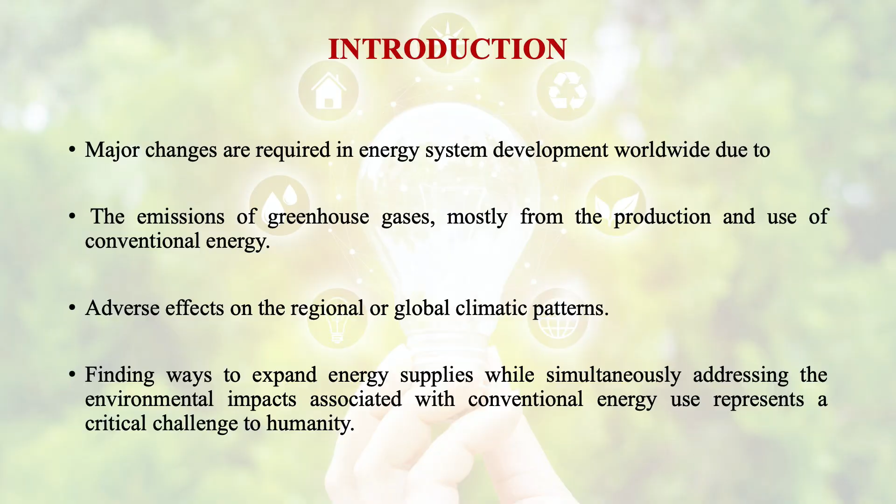Finding ways to expand energy supplies while simultaneously addressing the environmental impacts associated with conventional energy use represents a critical challenge to humanity. What is the effect of energy on environment and health? The resources and technology options that are available to meet these challenges are identified as energy efficiency, renewable energy sources, and advanced energy technologies. And the relation between energy and social issues is related to addressing the energy needs of the majority of rural people, especially the poor ones who could not pay for the energy that is available commercially.

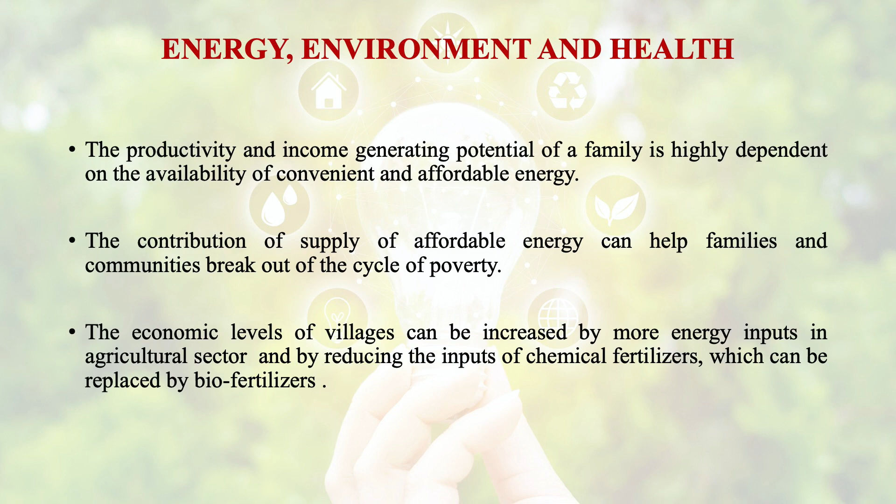A large majority of rural masses have very low ability to pay for energy in our country and require major structural changes. The productivity and income generating potential of a family is highly dependent on the availability of convenient and affordable energy. The supply of affordable energy can help families and communities break out of the cycle of poverty. The economic levels of villages can be increased by more energy inputs in the agricultural sector, such as increase in irrigated land area, and by reducing the inputs of chemical fertilizers, which can be replaced by fertilizers such as biogas manure. So biogas is very important to make our villages self-reliant in energy.

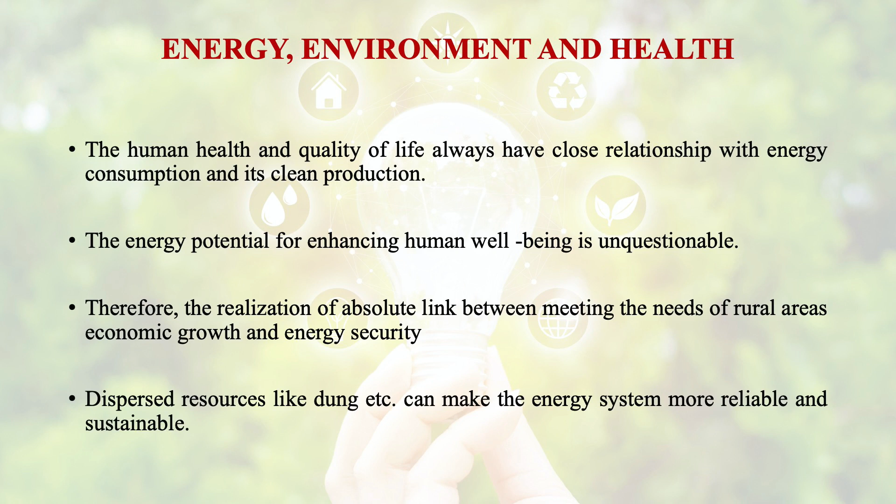Human health and quality of life always have a close relationship with energy consumption and its clean production. The energy potential for enhancing human well-being is unquestionable. Therefore, with the realization of the absolute link between meeting the needs of rural areas, economic growth and energy security, dispersed resources like dung, etc. can make the energy system more reliable and sustainable. On the other hand, in developing countries, most of the inhabitants in rural areas are dependent on dung and organic residue as fuel for cooking and heating.

Such is the case, for example, in the treeless regions of India, like the Ganges Plain and Central Highlands. And it is not only limited to India; the same condition is in Nepal and other countries of Asia as well. So the burning of dung, plant residue, even wood is a considerable waste of plant nutrients. Burning wood is not at all a good or wise decision.

Other than land, labor, capital and water, energy and manure have also become the most crucial factors for economic and social growth of villages. Efforts have to be made in this direction to create self-reliant villages in terms of energy, and the byproduct will be manure production by biomethanation technologies. Local resources like cow dung, waste from agricultural lands, and waste from the kitchens will be utilized there. This effort would provide a firm basis for economic and social development and long-term sustainability as well.

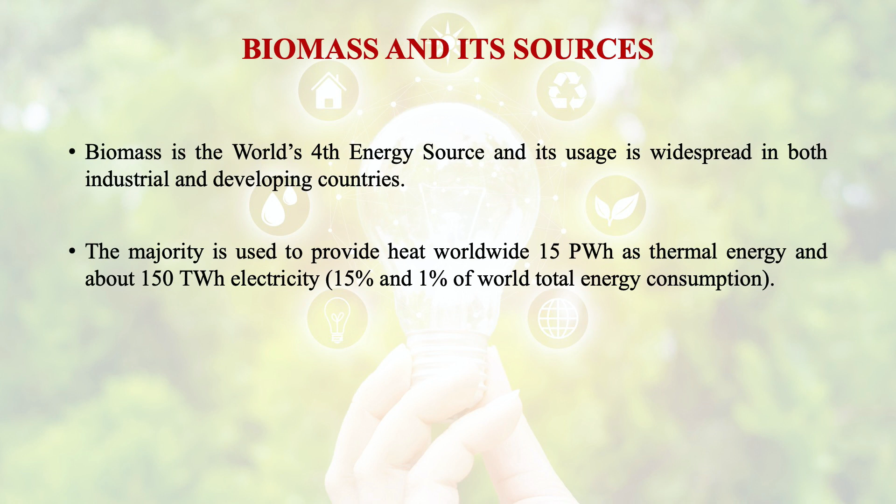15% and 1% of world total energy consumption. It means that 15% of thermal energy and 1% of electricity all over the world is provided by the biomass.

The major resources which can be used for biogas production are animal manure, poultry waste, pig waste, night soil, municipal organic waste, agricultural residues, forest residues, aquatic plants like water hyacinth, organic waste water from industries, either food processing, milk processing, meat processing, etc., hotels and restaurants, sanitary landfills. All these products or all these resources are generally the organic waste.

So what we need is a product that is organic in nature. It could be waste because we are going to utilize waste. We are going to generate energy from the waste.

Biogas. What is biogas? Biogas is a technology that refers to the production of a combustible gas, which is known as biogas, and a value-added fertilizer also, which is called slurry or sludge. And the process that is used to produce this biogas is the anaerobic fermentation of organic materials under certain controlled conditions.

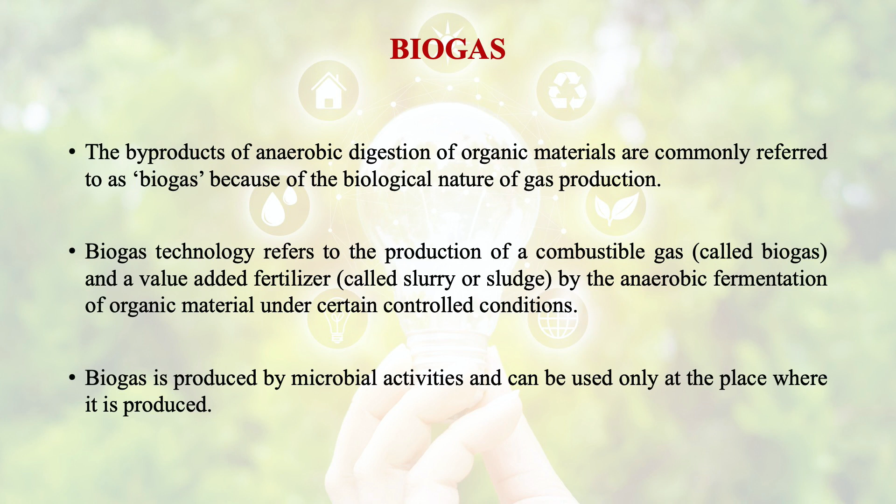The byproducts of anaerobic digestion of organic materials are commonly referred to as biogas because of the biological nature of the gas production. Because this gas is produced biologically, we are calling it biogas. It is produced by microbial activities and can be used only at the place where it is produced.

Though we are developing biogas bottling plants as well, and we are transporting this biogas in cylinders as well. But for that, we are going to purify that gas and use it for the transportation sector. The best utilization of biogas at least price is to use it at the place where it is produced. The transportation cost associated with biogas, either in a bottling plant or something else, is more.

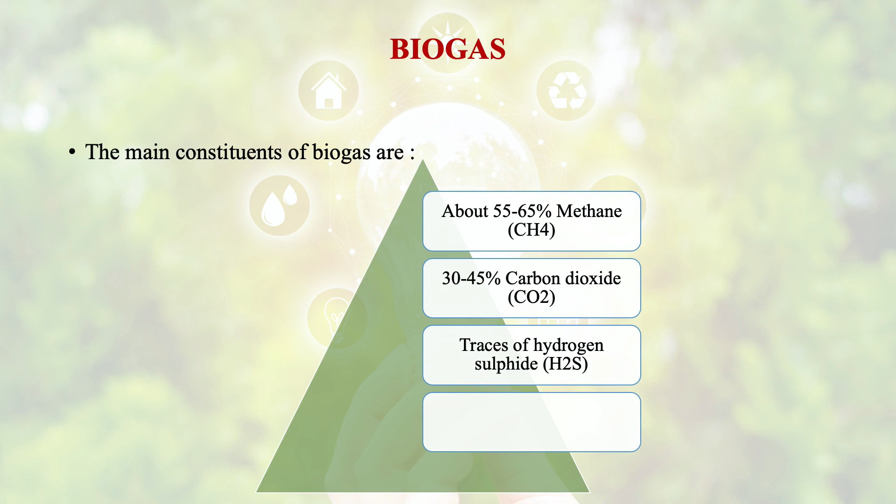And what are the main constituents of this biogas? Biogas consists of about 55 to 65% of methane, CH4, 30 to 45% of carbon dioxide, some traces of hydrogen sulfide, and a fraction of water vapor. Due to the presence of this water vapor, the calorific value of biogas is somewhat lower.

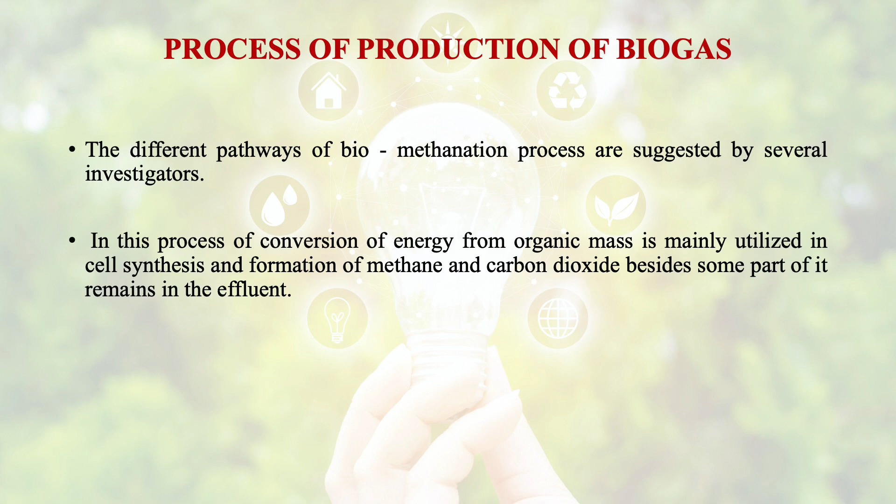What is the process of production of biogas? There are different pathways of the biomethanation process which are suggested by several investigators. Macro level energy conversion of organic waste is discussed here. In this process, energy from organic mass is mainly utilized in cell synthesis and formation of methane and carbon dioxide, besides some part of it remains in the effluent. This process of biomethanation consists of three processes.

First is hydrolysis. In hydrolysis, saprophytic bacteria convert complex organic compounds into less complex organic compounds which are water soluble. Hydrolysis is the first step in this anaerobic degradation and also the rate limiting step. From here we can determine the rate of production.

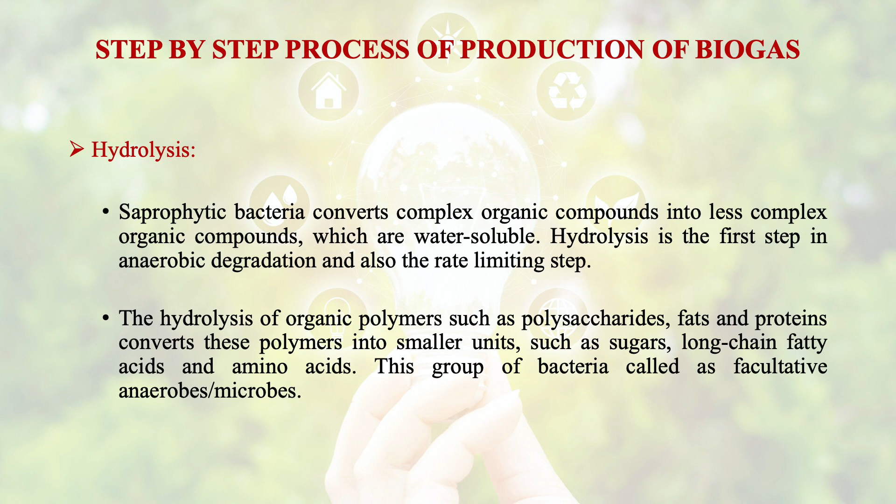The hydrolysis of organic polymers such as polysaccharides, fats and proteins converts these polymers into smaller units such as sugars, long chain fatty acids and amino acids. This group of bacteria is called facultative anaerobes or microbes.

Then the second process is acetogenesis. In this process, the sugars, long chain fatty acids and amino acids resulting from hydrolysis are used as substrates by a wide variety of different fermentative organisms or by anaerobic oxidizers.

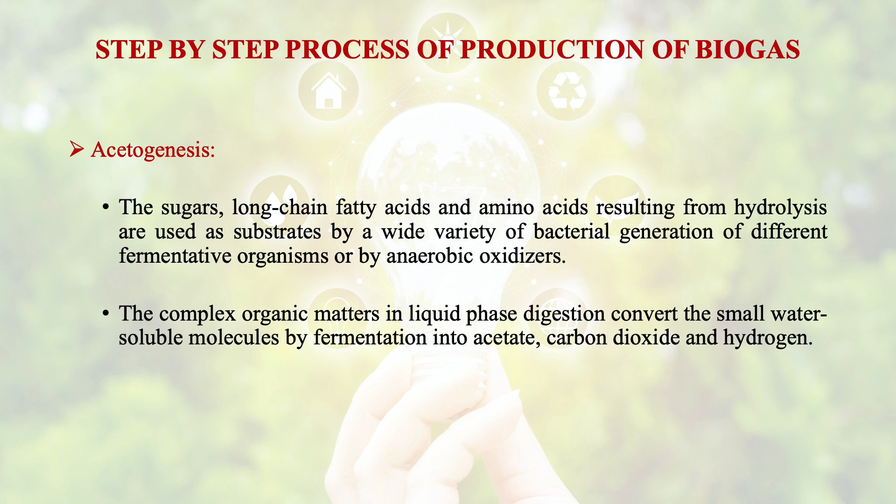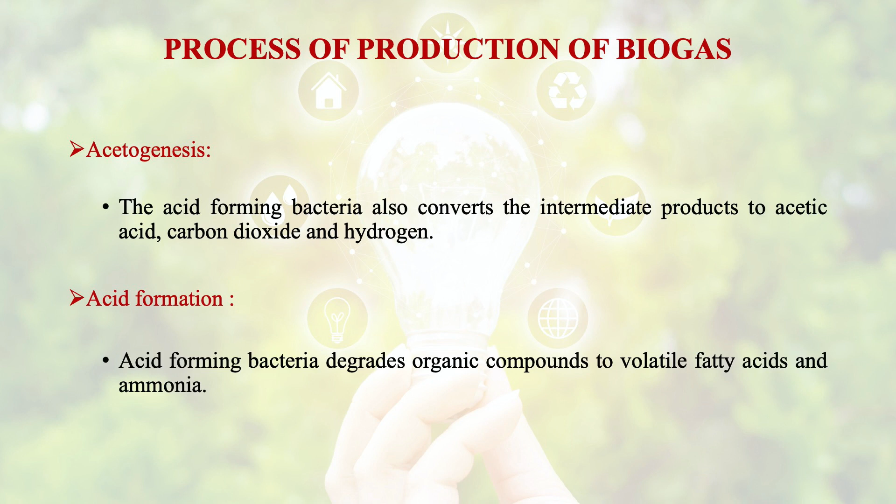The complex organic matters in liquid phase digestion convert the small water soluble molecules by fermentation into acetate, carbon dioxide and hydrogen. The acid forming bacteria also convert the intermediate products to acetic acid, carbon dioxide and hydrogen. Then acid formation. Acid forming bacteria degrade organic compounds to volatile fatty acids and ammonia.

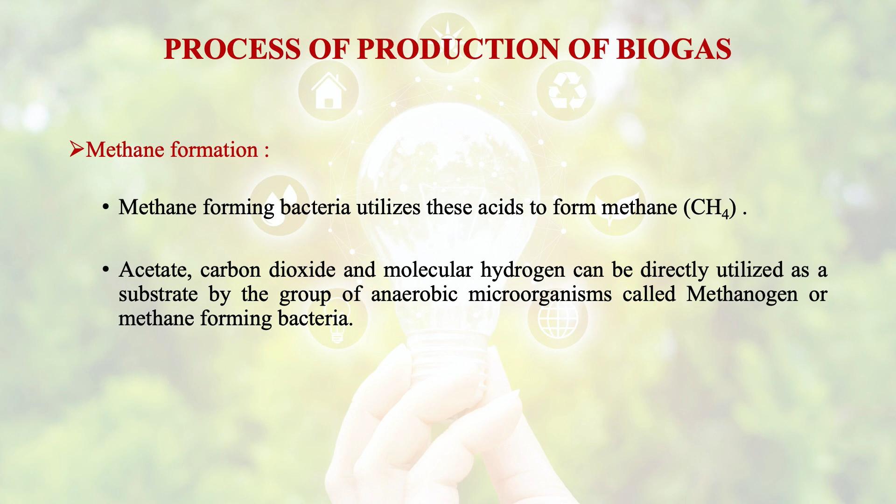Then the last step is methane formation. In methane formation, methane forming bacteria utilize these acids to form methane. Acetate, carbon dioxide and molecular hydrogen can be directly utilized as a substrate by the group of anaerobic microorganisms called methanogens or methane forming bacteria.

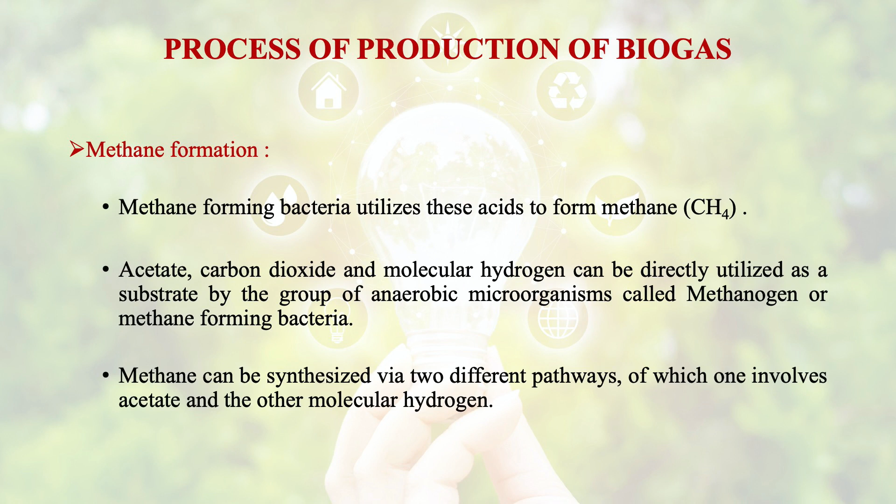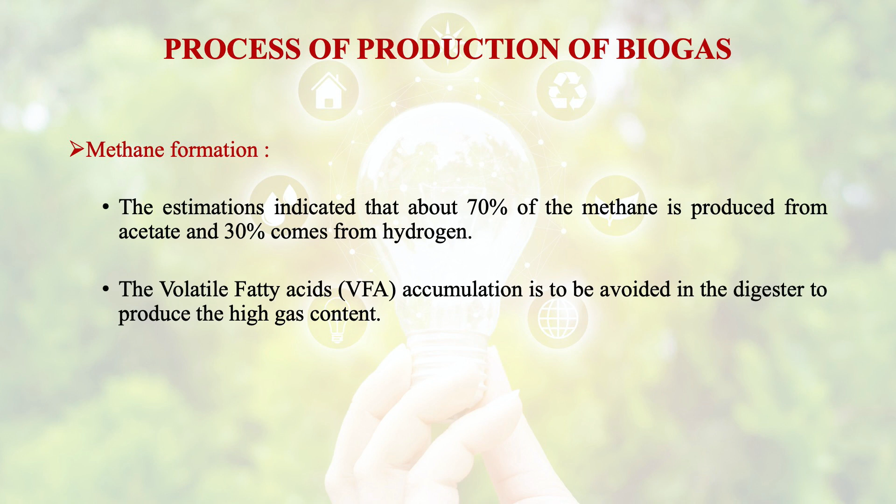Methane can be synthesized via two different pathways, of which one involves acetate and the other involves molecular hydrogen. The estimations indicated that about 70% of the methane is produced from acetate and 30% comes from hydrogen. Volatile fatty acid accumulation is to be avoided in the digester to produce high gas content.

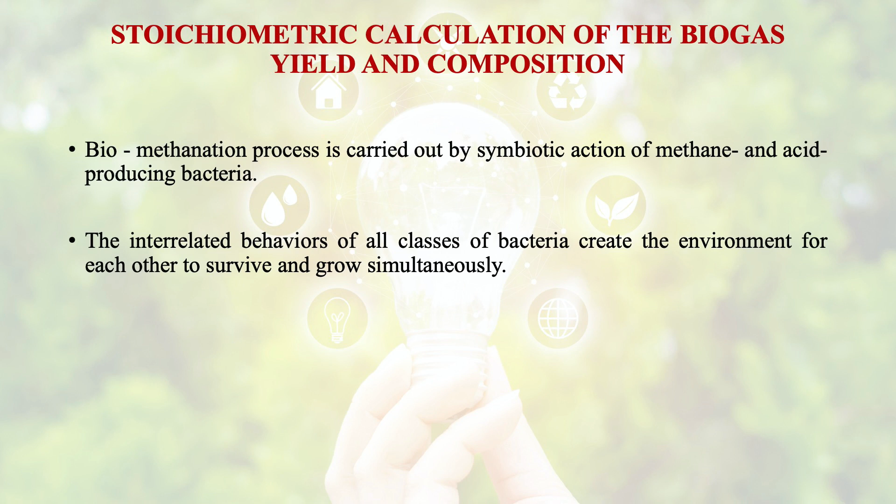Then the stoichiometric calculation of the biogas yield and composition. As this biomethanation process is carried out by the symbiotic action of methane and acid producing bacteria, the interrelated behaviors of all classes of bacteria create the environment for each other to survive and grow simultaneously.

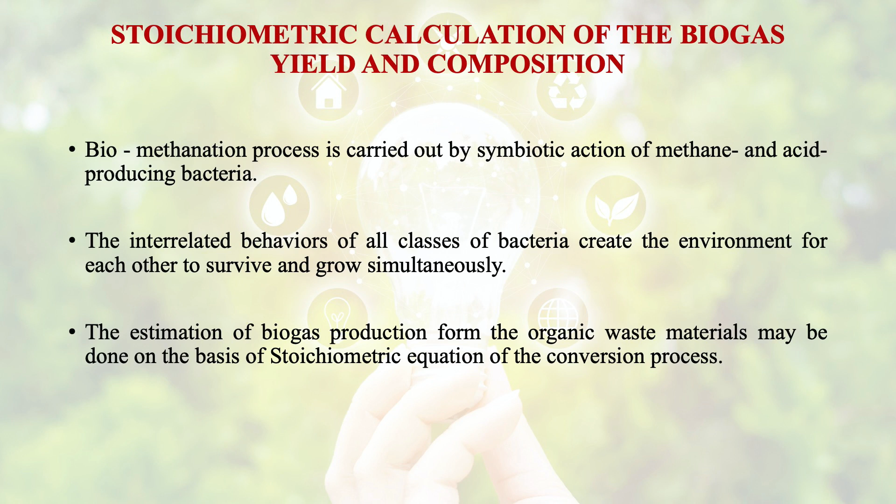The estimation of biogas production from the organic waste materials may be done on the basis of the stoichiometric equation of the conversion process. The simple equation is considered by Ghale and Ramkumar for calculations of the theoretical yield of methane and carbon dioxide, which is biogas, produced by anaerobic digestion using Buswell's formula.

We consider this organic compound as CnHaOb, and when it reacts with H2O, how many moles of H2O will be there? We have to calculate it on the basis of n. n is the number of carbon atoms. So the moles of water will be (4n minus a minus 2b)/4, where n is the number of carbons, a is for hydrogen, and b is for oxygen. 4n minus a minus 2b.

Suppose we have C6H12O6, then n is 6, a is 12, b is 6. So 4n minus a minus 2b, and what will it give? It will give 4n plus a minus 2b, whole divided by 8, these moles of CH4 we are going to get, and 4n minus a plus 2b, whole divided by 8, these moles of CO2 we are going to get. Means equal moles of CH4 and CO2 we are going to get.

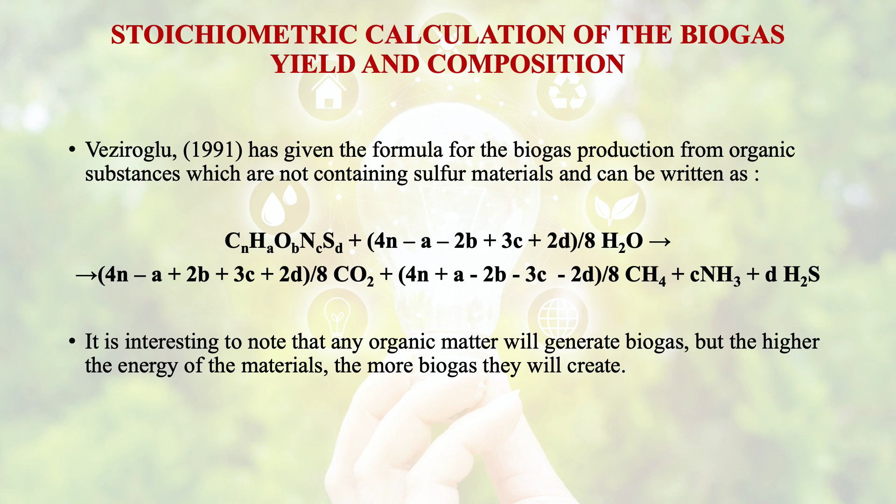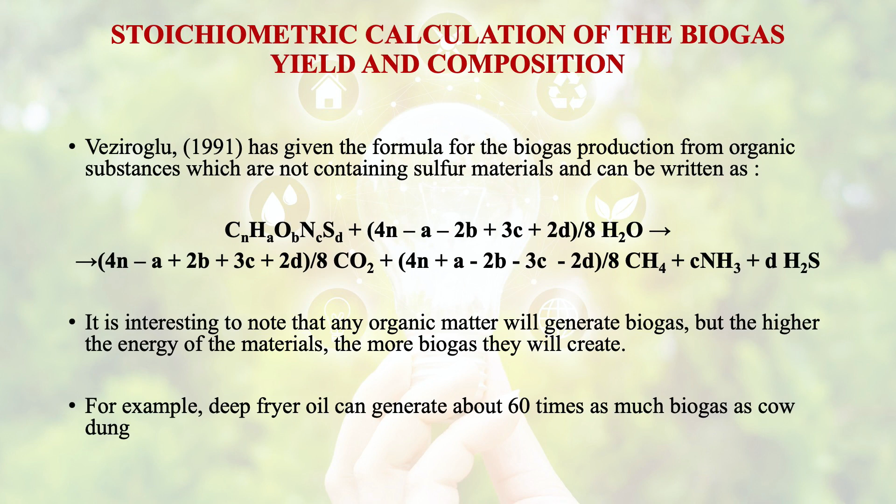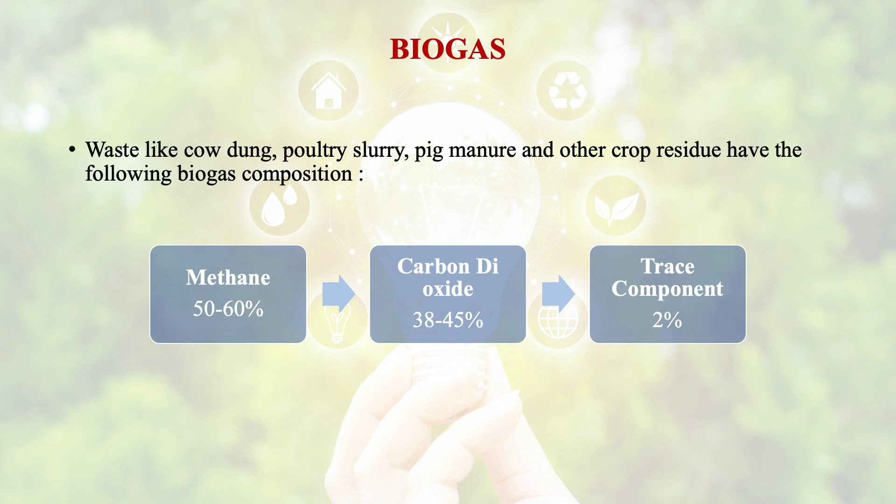Though every organic matter will generate biogas, the higher the energy of the material, the more biogas it will create. For example, deep fryer oil can generate about 60 times as much biogas as cow dung. So it depends upon the energy content of the material we use as organic waste. For biogas, we can use waste like cow dung, poultry slurry, pig manure and other crop residue. These have the following biogas composition: methane about 50 to 60%, carbon dioxide 38 to 45%, and trace components 2%, which could be hydrogen, hydrogen sulfide, non-methane volatile organics, etc.

The commonly used fuels in the transportation sector or in boilers are biogas, dung cake, firewood, diesel, kerosene. If we compare their calorific value and thermal efficiency, biogas has 4000 to 5000 kilocalorie per meter cube calorific value, while diesel has 10,550 kilocalorie per kg. The thermal efficiency for biogas is 55 to 60%, while for diesel it is 60 to 70%. So if we compare biogas with other fuels, we will find it at par. While the calorific value of dung cake is only 1900 to 2100 kilocalorie.

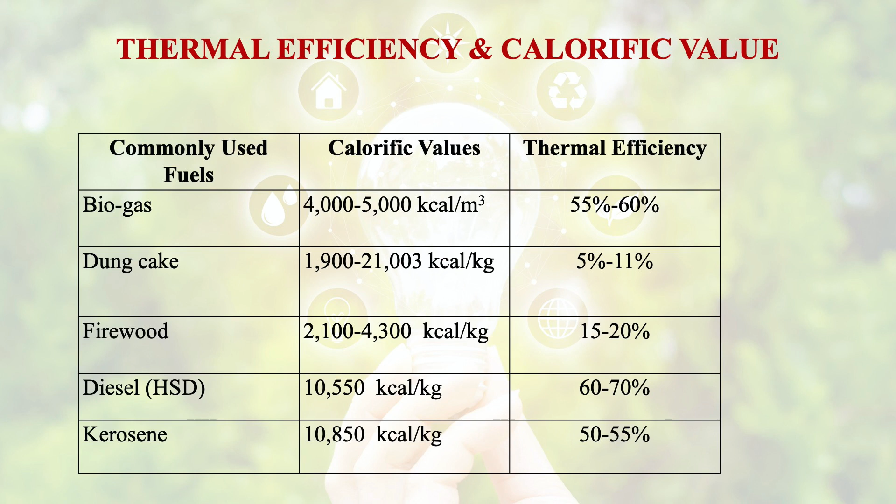What will be the thermal efficiency? 5 to 11% only. Firewood: 2100 to 4300 kilocalorie per kg. Thermal efficiency will be low, 15 to 20%. So we can see that this biogas is at par with all the other fuels.

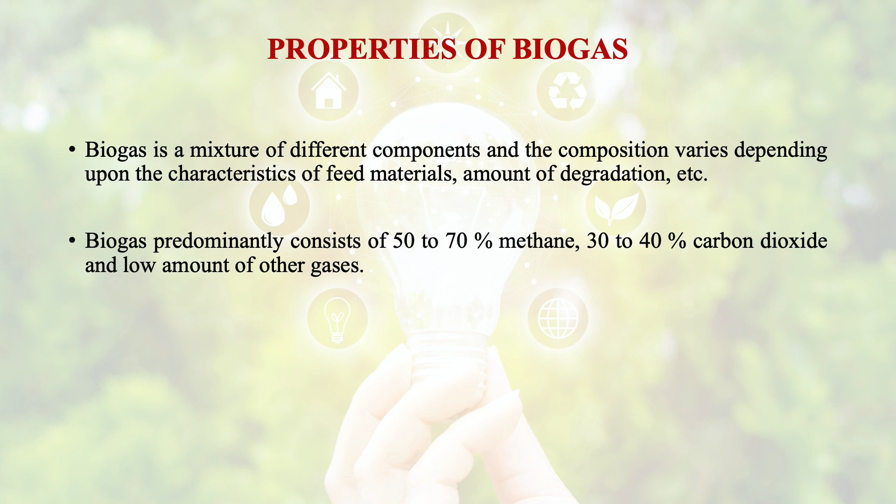What are the properties of this biogas? It is a mixture of different components and the composition varies depending upon the characteristics of feed material. Feed material is the type of waste that we are going to use for the production of biogas. Amount of degradation, etc. Biogas predominantly consists of 50 to 70% of methane, 30 to 40% of carbon dioxide, and low amount of other gases.

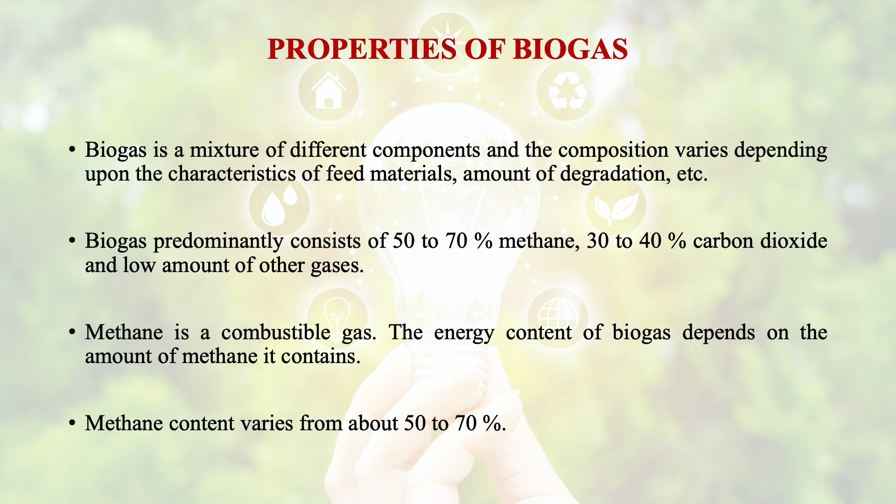Methane is a combustible gas. The energy content of biogas depends on the amount of methane it contains. Methane content varies from about 50% to 70%. The interest in biogas as an alternative fuel comes mainly from its clean burning qualities and its domestic resource base.

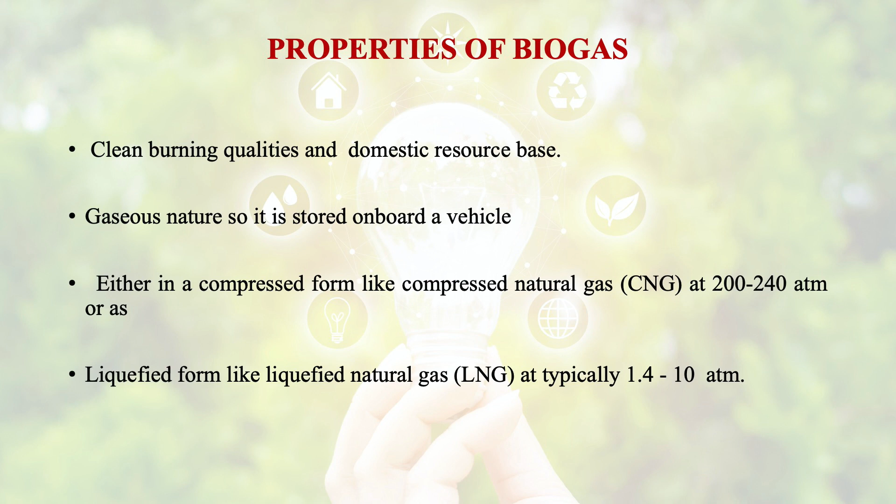Because of the gaseous nature of this fuel, it must be stored on board a vehicle in either a compressed form like CNG at 200 to 240 atmospheric pressure or a liquefied form like liquefied natural gas, LNG, at typically 1.4 to 10 atmosphere. It is produced in biogas plants or landfill sites, and is primarily composed of methane and carbon dioxide with smaller amounts of hydrogen sulfide and ammonia.

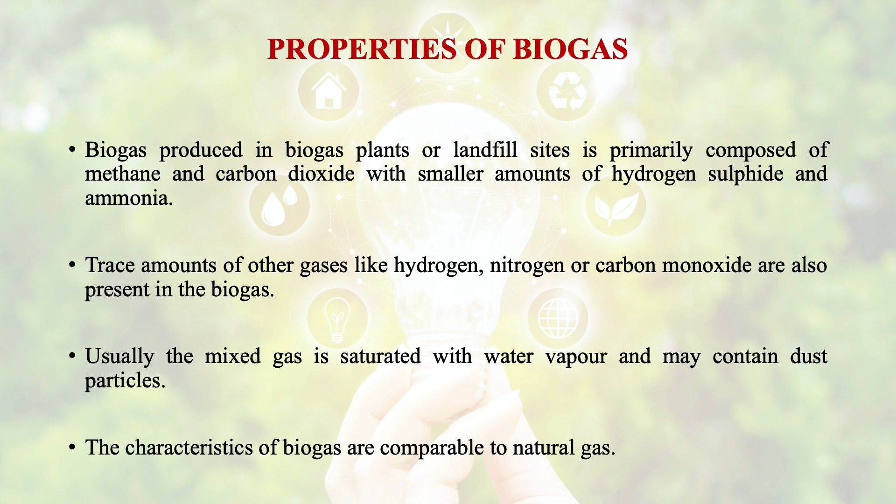Trace amounts of other gases like hydrogen, nitrogen or carbon monoxide are also present in the biogas. Usually the mixed gas is saturated with water vapor and may contain dust particles as well. The characteristics of biogas are somewhat comparable with natural gas. The energy content is defined by the concentration of methane. 10% of methane in the dry gas corresponds approximately to 1 kWh per meter cube.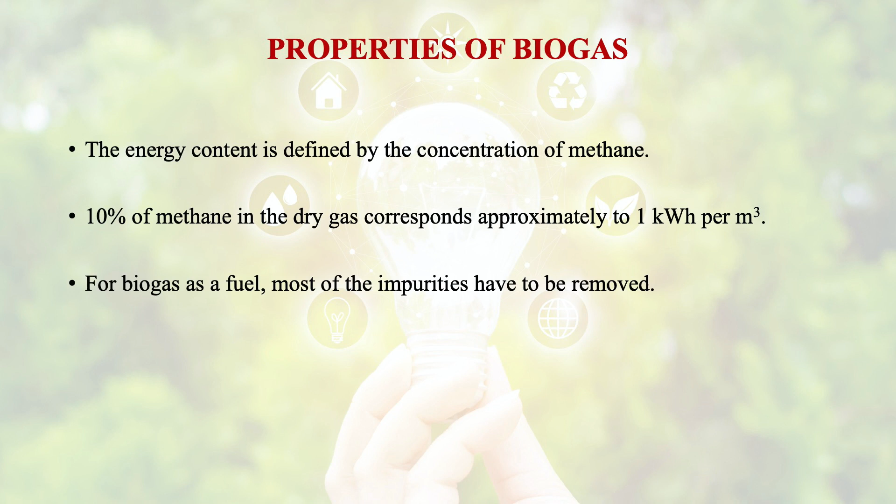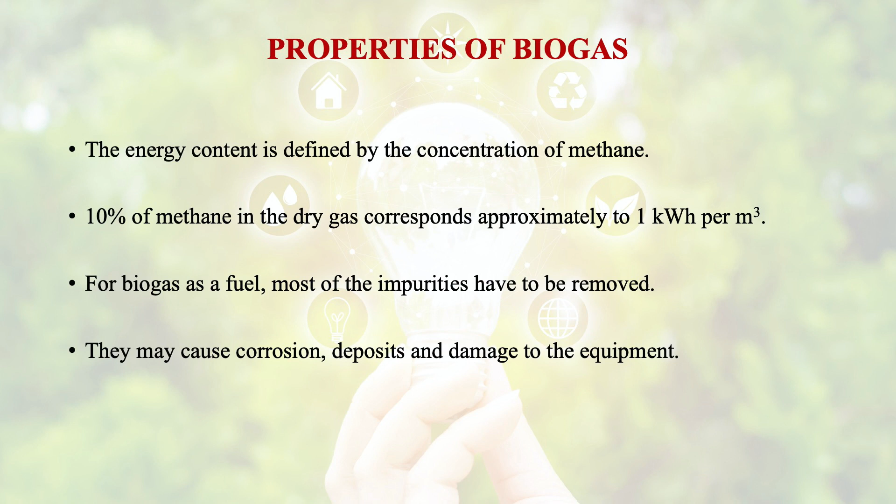For biogas as a fuel, most of the impurities have to be removed because they may cause corrosion, deposits and damage the equipment. Substances such as hydrogen sulfide, water, carbon dioxide, halogen compounds like chlorides, fluoride, siloxanes, aromatic compounds, air, oxygen and nitrogen need to be removed.

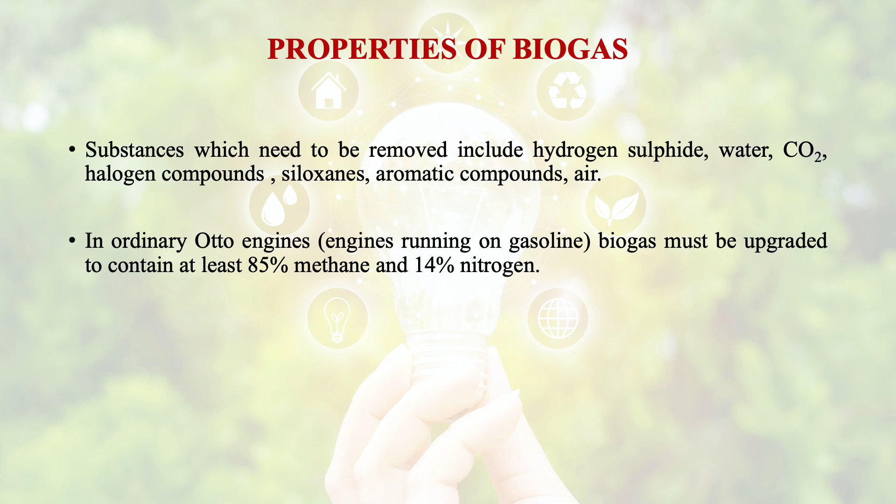For the use of biogas in ordinary Otto engines, that is petrol engines, biogas must be upgraded to contain at least 85% methane and 14% nitrogen. This is the minimum fuel quality for which the natural gas fuel vehicles are approved. It is also important that the gas quality is maintained at a fixed composition in order to prevent an increased NOx emission. Purification of biogas is primarily achieved by carbon dioxide removal. This enhances the energy value of the gas and it will help to increase the calorific value.

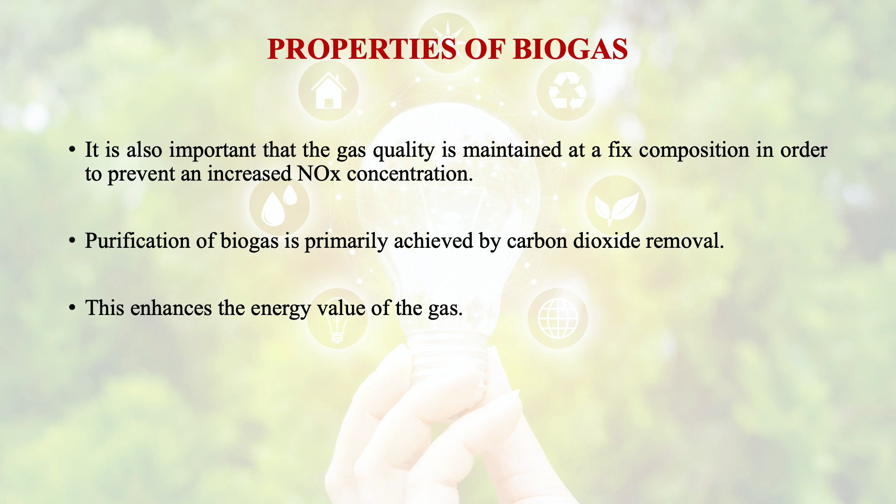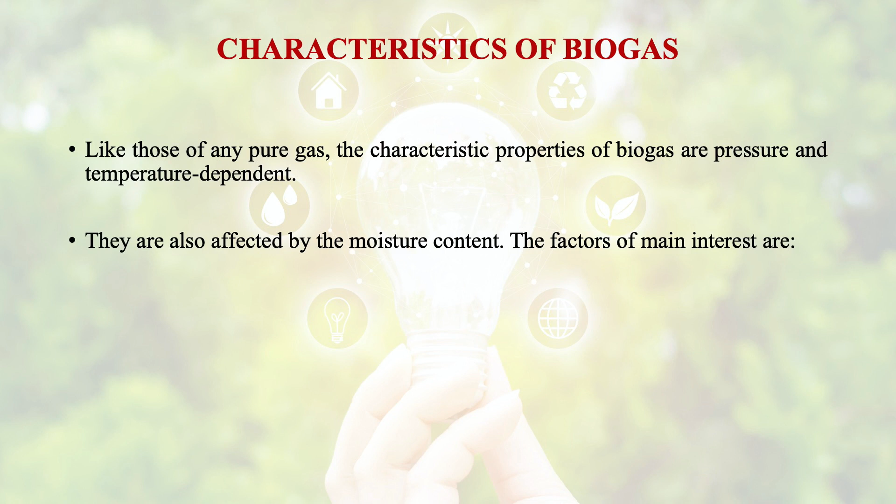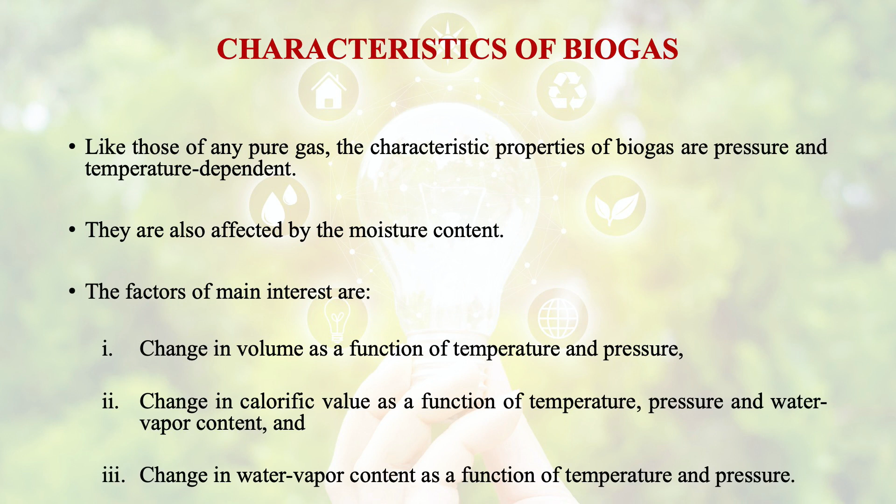Like those of any pure gas, the characteristic properties of biogas are pressure and temperature dependent. If we talk about their characteristic properties, they are fully dependent upon the temperature and pressure and moisture content as well. The factors of main interest are change in volume as a function of temperature and pressure, change in calorific value as a function of temperature, pressure, and the calorific value or energy content also depends upon the moisture content. So here water vapor content will also come. So change in calorific value as a function of temperature, pressure and water vapor content. And change in water vapor content is again the function of temperature and pressure.

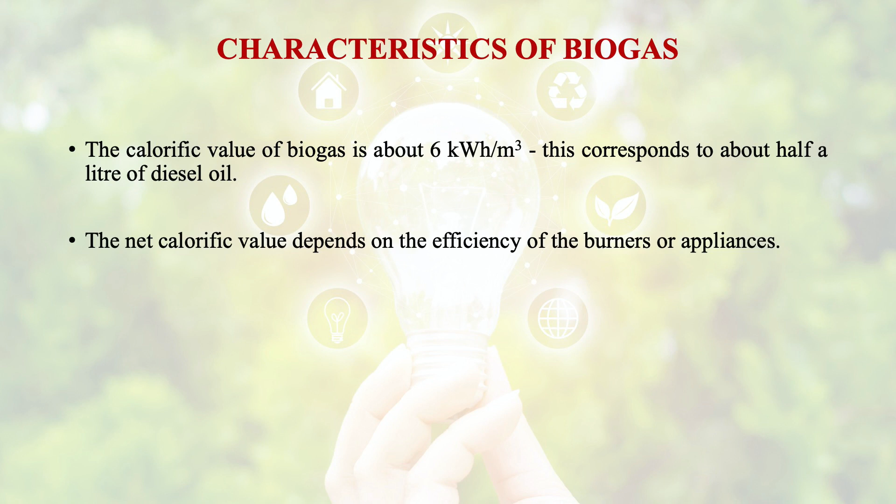The calorific value of biogas, if we talk about kilowatt hour, is near about 6 kilowatt hour per meter cube and it corresponds to about half a liter of diesel oil. The net calorific value depends on the efficiency of the burners or the appliances where we are going to use it. Methane is a valuable component under the aspect of using biogas as a fuel.

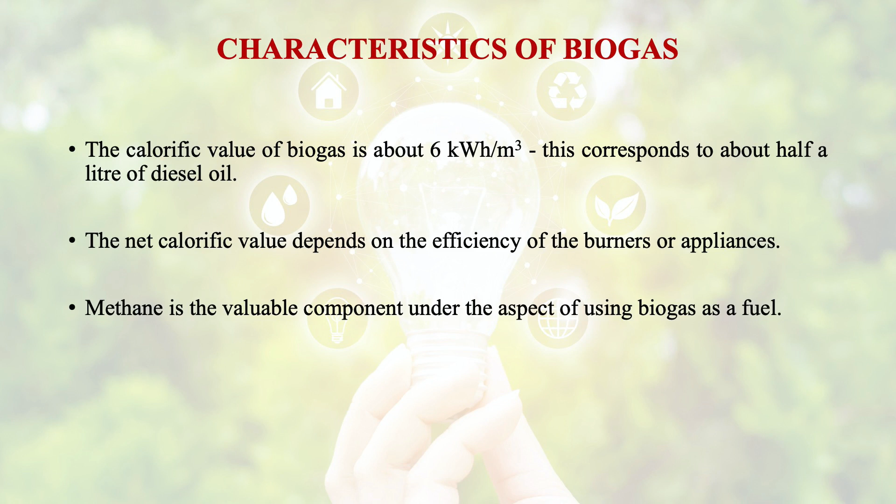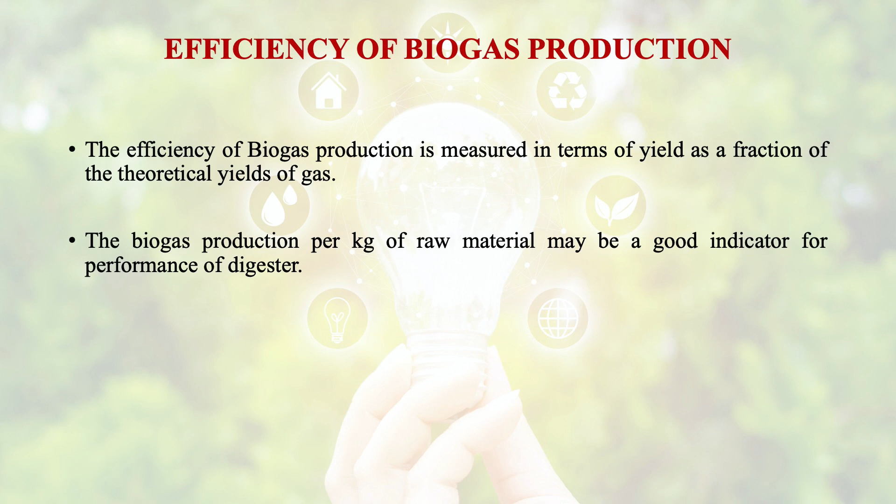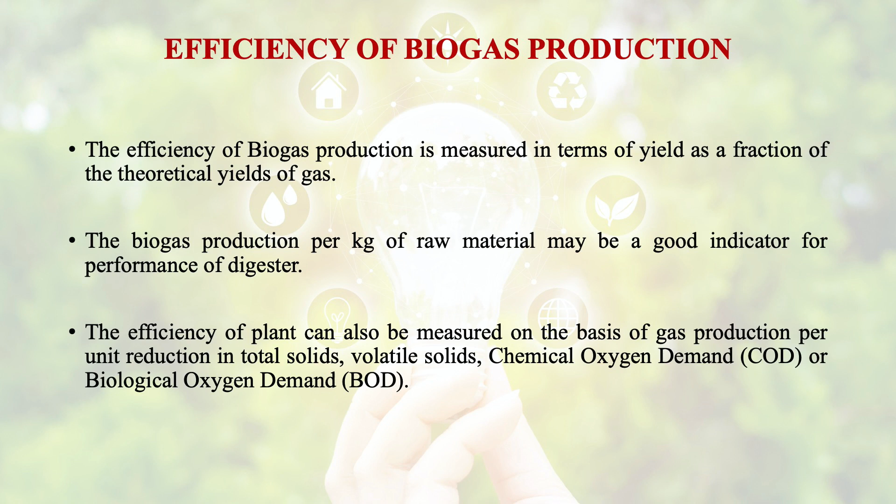Now comes the efficiency of biogas production. The efficiency of biogas production is measured in terms of yield as a fraction of the theoretical yields of gas. The biogas production per kg of raw material may be a good indicator for performance of digester. The efficiency of plants can also be measured on the basis of gas production per unit reduction in total solids, volatile solids, chemical oxygen demand or biological oxygen demand. The total solids and volatile solids are normally used to measure the efficiency as biomass is a solid material.

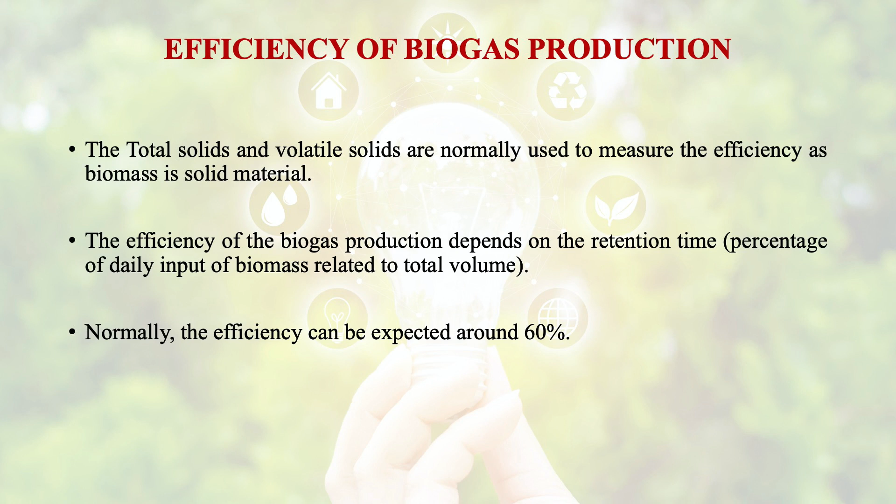The efficiency of the biogas production depends on the retention time, that is percentage of daily input of biomass related to total volume. So the efficiency of biogas production depends on the retention time and retention time is percentage of daily input of biomass that is related to the total volume. Normally the efficiency can be expected around 60%. The biogas production also depends on the biological oxygen demand in the wastewater. The biological oxygen demand reduction will generate 0.8 meter cube of biogas for each kg of BOD removal.

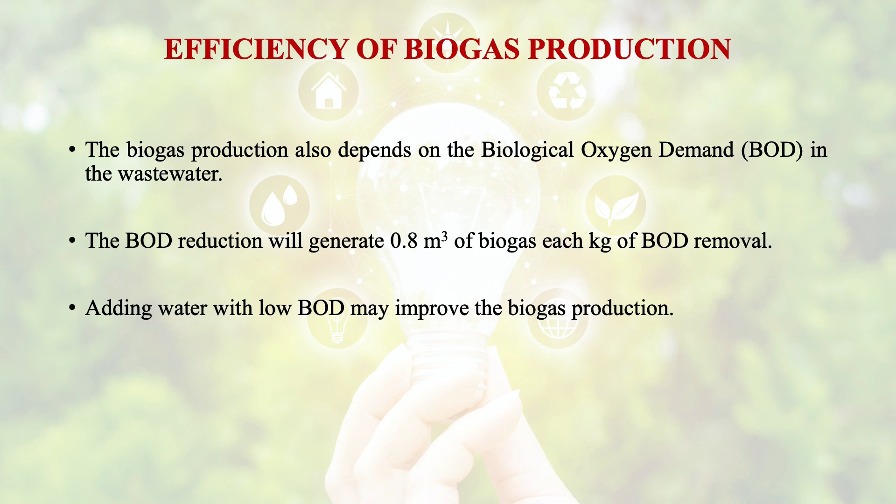Adding water with low BOD from the end of the anaerobic process will dilute the high inlet biological oxygen demand and improve the biogas process.

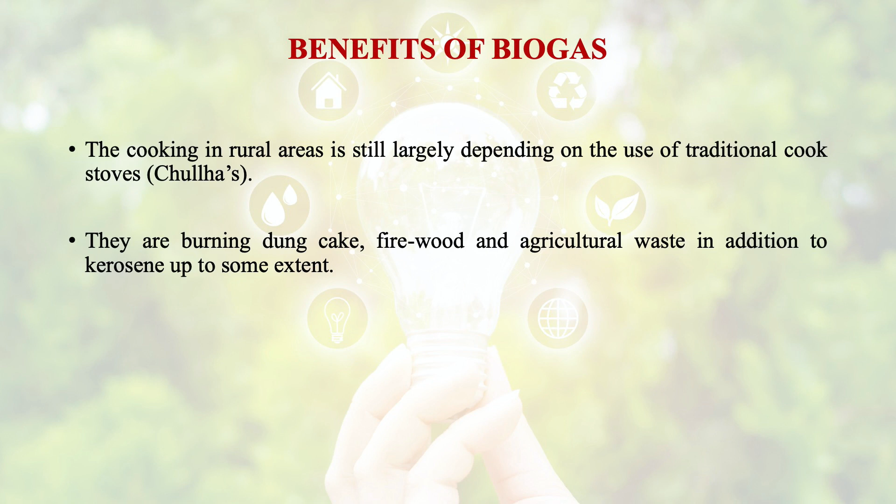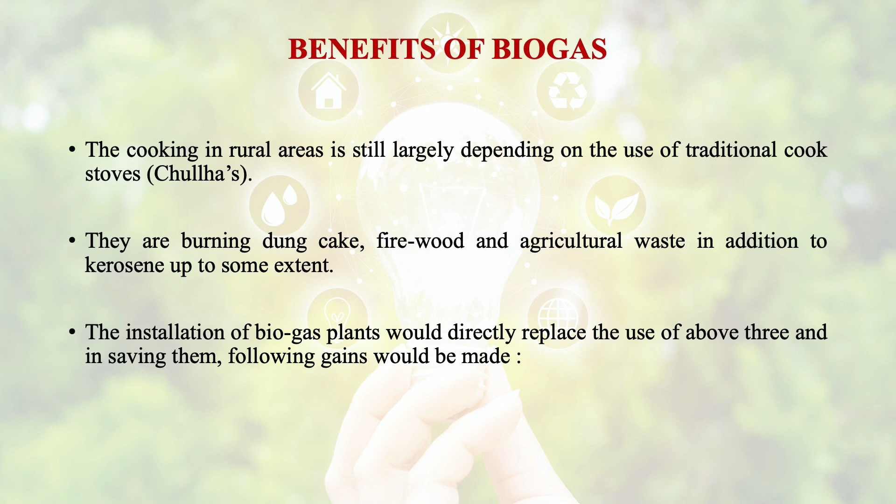What are the benefits of biogas? Cooking in rural areas still largely depends on traditional cook stoves, called Chullha, generally burning dung cake, firewood, and agricultural waste, in addition to kerosene to some extent. The installation of biogas plants would directly replace the use of these three, and in doing so, gains would be made: reduction in pollution due to burning of dung and other biomass materials.

Dung can be conserved if biogas plants are used. Again, the dung after digestion in the gas plant preserves more of nitrogen, phosphorus, and potash.

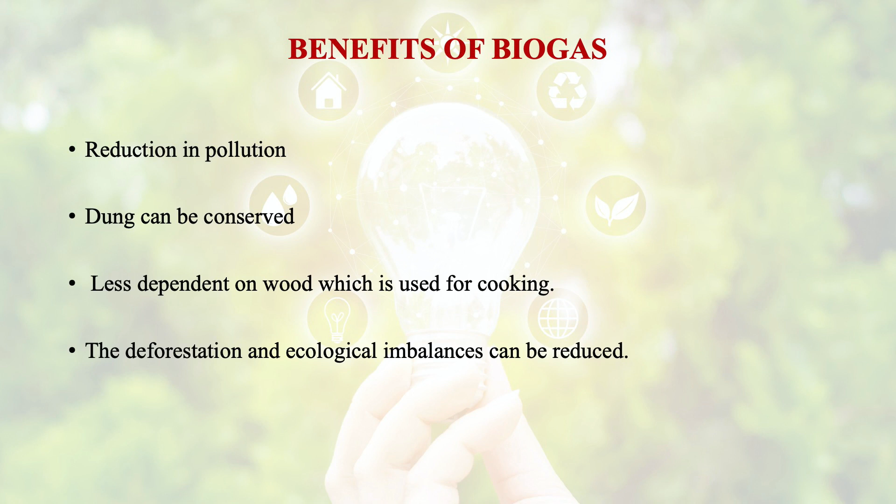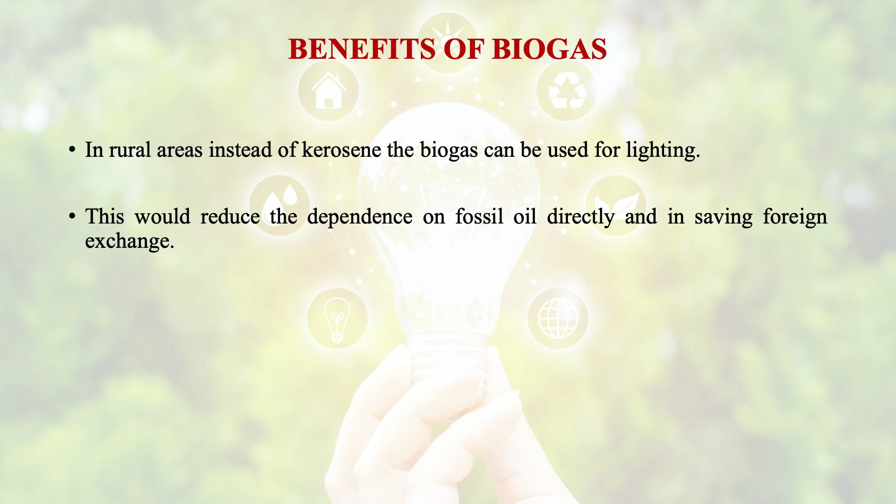The rural people would not be dependent on wood, which is used for cooking. Deforestation and ecological imbalances can be reduced. In rural areas, instead of kerosene, biogas can be used for lighting, which would reduce dependence on fossil fuel directly and save foreign exchange.

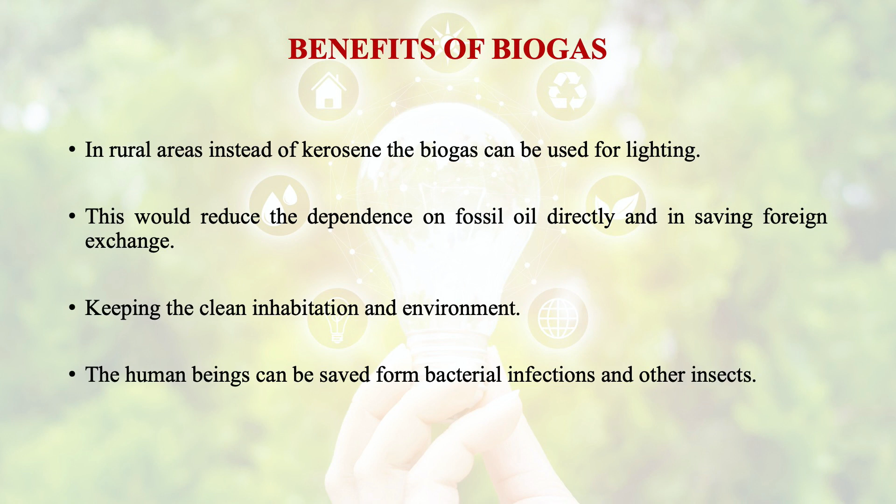The most important benefit would be keeping habitation and the environment clean. Human beings can be saved from bacterial infections and other insects.

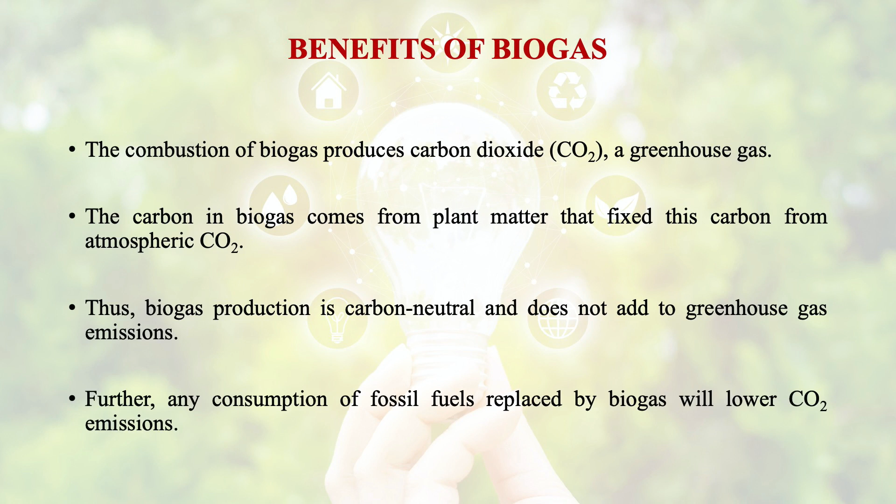The combustion of biogas produces carbon dioxide, a greenhouse gas. The carbon in biogas comes from plant matter that fixed this carbon from atmospheric carbon dioxide. Thus, biogas production is carbon neutral and does not add to greenhouse gas emissions. Further, any consumption of fossil fuels replaced by biogas will lower carbon dioxide emissions.

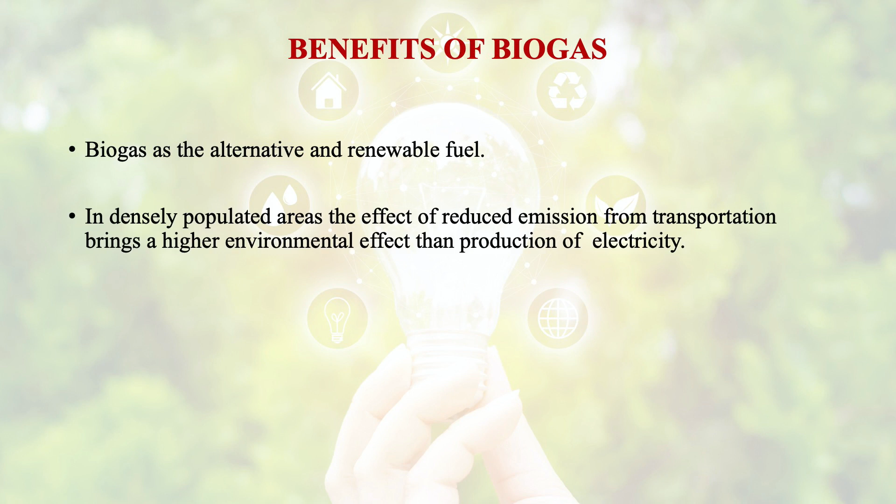Nevertheless, there is huge potential for biogas as an alternative and renewable fuel. In densely populated areas, the effect of reduced emissions from transportation brings a higher environmental benefit than production of electricity.

The main obstacle in biogas production as an alternative fuel is the high cost of upgrading equipment, which is too expensive for small scale systems. Some other limitations, as already discussed, are few technological advancements. An unfortunate disadvantage of biogas today is that the systems used in its production are not efficient.

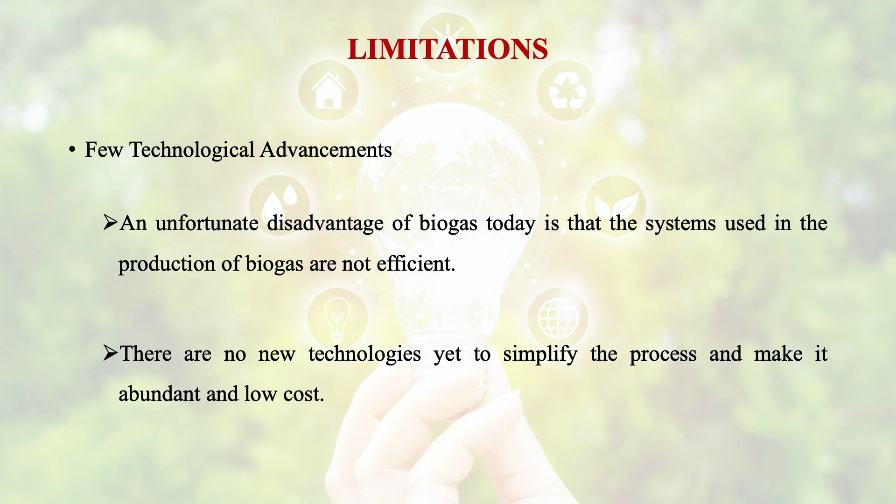There are no new technologies yet to simplify the process and make it abundant and low cost. This means large-scale production to supply a large population is still not possible. Although the biogas plants available today are able to meet some energy needs, many governments are not willing to invest in this sector.

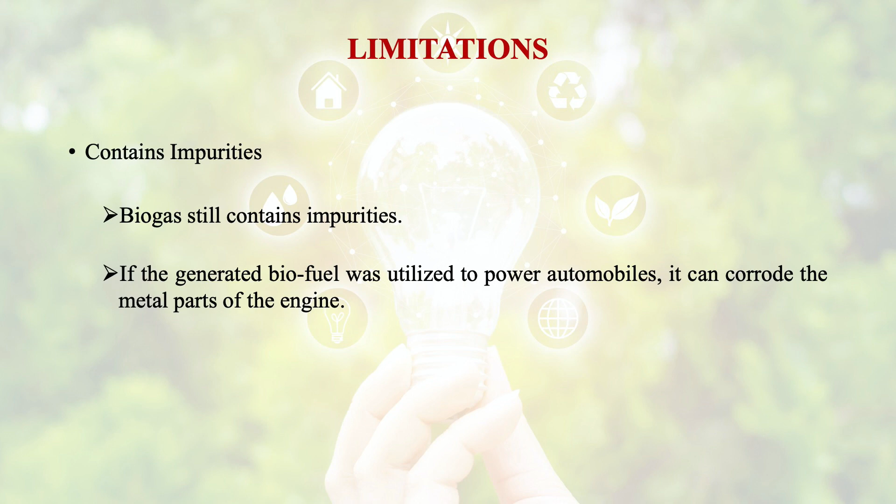Biogas contains impurities. After refinement and compression, it still contains impurities. If the generated biofuel was utilized to power automobiles, it can corrode the metal parts of the engine, leading to increased maintenance cost. The gaseous mix is much more suitable for kitchen stoves, water boilers, and lamps.

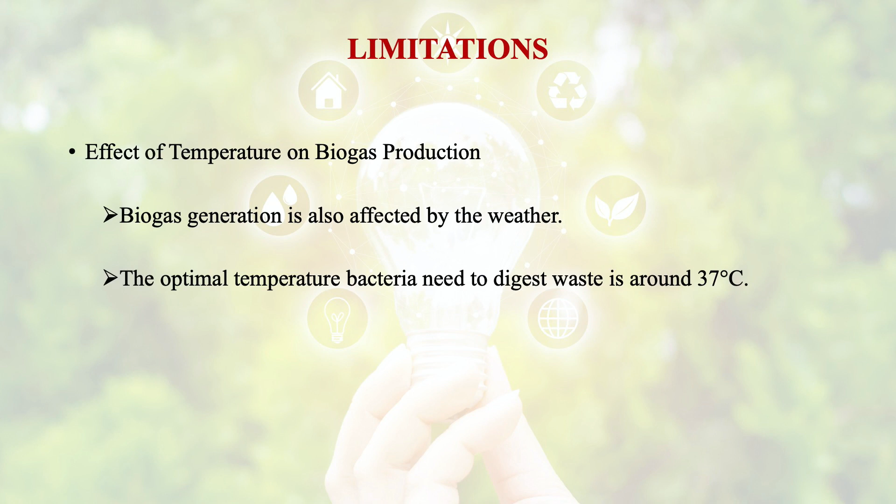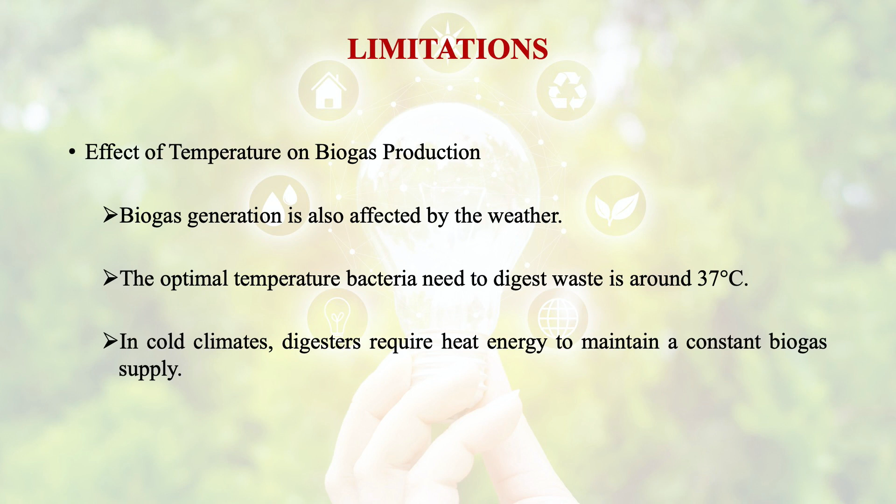Next, the effect of temperature on biogas production. Like other renewable energy sources, such as solar and wind, biogas generation is affected by weather. The optimal temperature bacteria need to digest waste is around 37 degrees centigrade, whereas in cold climates digesters require heat energy to maintain a constant biogas supply. It is less suitable for dense metropolitan areas.

Another disadvantage is that industrial biogas plants only make sense where raw materials are in plentiful supply, such as food waste and manure. For this reason, biogas generation is much more suitable for rural and suburban areas. So these are certain limitations for the application of biogas technologies.

Let us summarize this module. We have discussed that biogas originates from bacteria in the process of biodegradation of organic material under anaerobic conditions—anaerobic meaning without air. The natural generation of biogas is an important part of the biogeochemical carbon cycle.

We discussed methanogenesis, and that the gases methane, hydrogen, and carbon monoxide can be combusted or oxidized with oxygen. Air contains 21% oxygen. This energy release allows biogas to be used as a fuel.

We also discussed that biogas is generated and is a source of renewable energy, and that it can be used as a low-cost fuel in any country for any heating purpose such as cooking. It can also be utilized in modern waste management facilities to run any type of heat engine, generating either mechanical or electrical power. We also discussed that, being a renewable fuel, electricity produced from it can be used to attract renewable energy subsidies in some parts of the world.